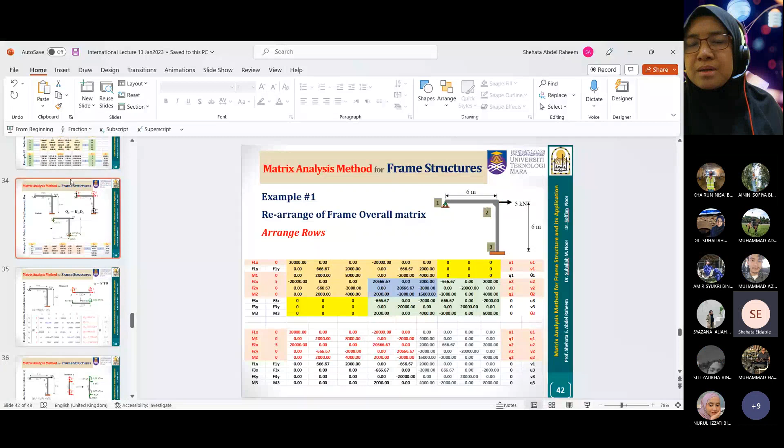Can you open your camera, Prof? Just one moment. I think just a moment to set up. Yeah, no problem. It's good to see you for the first time, Prof. Yes, I am fine now. Now it's available to see the camera and the PowerPoint presentation. Class, can you see the slide, the screen right now? Yes, Doctor, yes, yes. Yeah, Alhamdulillah. I am ready now. Okay.

We have here Dr. Soffian as well. Welcome Dr. Soffian. Dr. Soffian, can you open your camera? Assalamualaikum. Walaikum assalam wa barakatuh, Dr. Soffian. How are you, Prof? Fine, it's okay, I am fine. I hope that you are fine. Yeah, I'm fine here. Okay, Dr. Suhaliah, we can proceed with the lecture, isn't it?

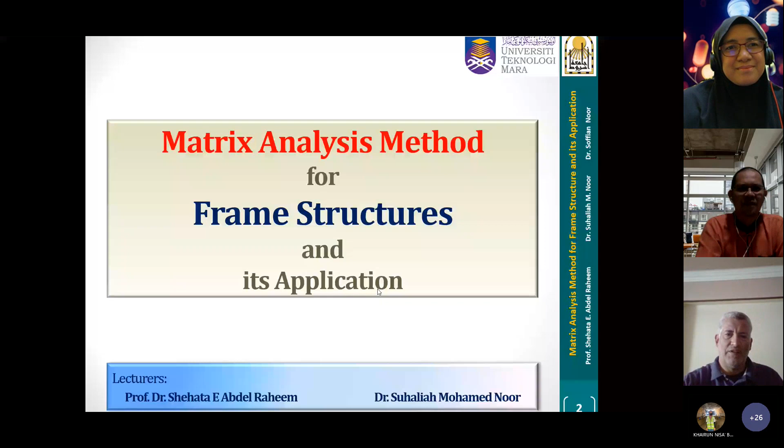Let's go to the next slides. Our lecture today is about matrix analysis methods for frame structure and its applications, with the cooperation of Dr. Suhaliah and Dr. Soffian. I hope we keep this cooperation for the future, inshallah. This is the first step, and maybe there will be more lectures, inshallah. Just now we go with some definitions.

Matrix analysis or matrix methods is an approach for computer structure analysis, commercial software, or either your own software for structure analysis.

As we know, during our previous study we went with conventional structure analysis by hand calculations. This is for structure analysis, structures statically indeterminate or determinate. Our study was limited to simple structures, either beams, frames, or trusses. Once the size of the structure goes higher, our hand calculation becomes unmanageable, so it's difficult to continue with hand calculation. So the size of the structure is limited for hand calculation.

Another approach is for statically indeterminate structures. We have different approaches, either force methods, slope deflection, or three moments, and each method has its complications. Another point is some assumptions that limit us only to rigid supports like roller, hinge, or fixed. However, it's difficult to go with elastic supports or semi-rigid supports. That's some limitation for hand calculations.

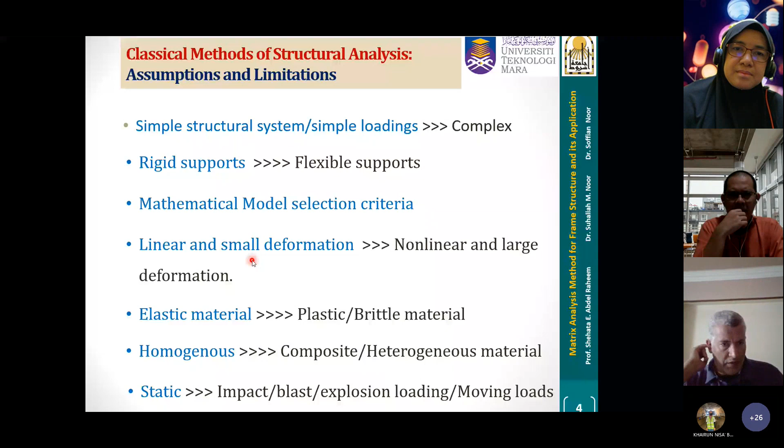Different loading, either statics - that's our classical methods. But with matrix analysis, we can open all these windows. So let's go to the next. So the advantage of our matrix methods,

It's formalized - that's valid for all kinds of structures with the same systematic proceeding. It's computer friendly, and the calculation can be performed efficiently.

Suitable for large structures, it's open for any size of structure. Applicable for statically determinate and indeterminate structures with the same process and proceeding. But for classical methods, you should have different methods of analysis, different approaches, which make the analysis difficult.

Easy to be programmed. However, the disadvantage is it needs more calculations. You should know about discretization and the formulation of the different elements, like curved beams or solids or something.

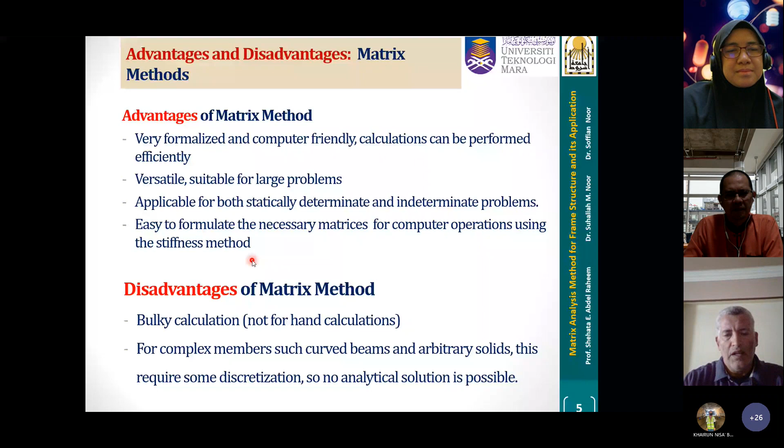The learning outcomes: we should know about mathematical modeling, learn how to apply any commercial software, whatever the name of this software, but we should know the technical terms. So you can go with any software, whatever the production company of this software. Another point, how to read the output of this commercial software and explain if it's logical or illogical.

Another point is the assumptions and their limitations. We will pay attention to these points during our lecture.

The flow chart of the matrix analysis. We should first define our structure, either a frame, a truss, or beams. So this is the unit that will be used to build our structure.

Once we formulate the stiffness matrix of the unit, we go to the global matrix - it's the structural stiffness matrix. And we have a magic equation that solves all structures, either truss, frame, or beams, 2 dimensional or 3 dimensional.

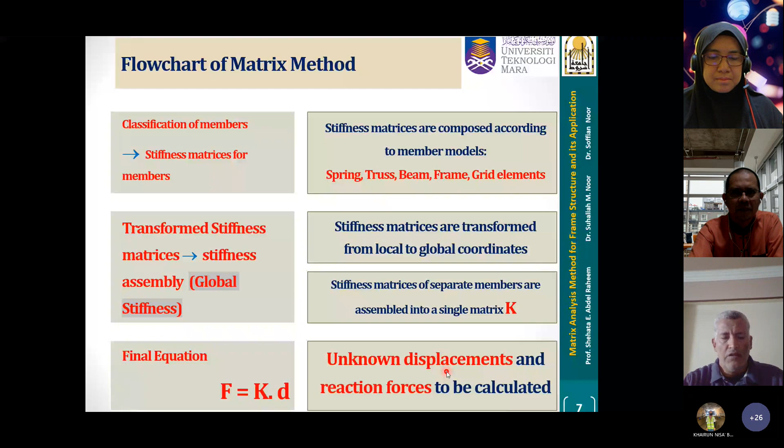During this magic equation, as structural analysis, we should keep our fundamentals. The equilibrium equation should be valid. The compatibility equation should be valid for the displacement. The material constitutive equation that relates stresses to strain should be valid. With these three fundamentals, we build the matrix equation F equals K multiplied by D.

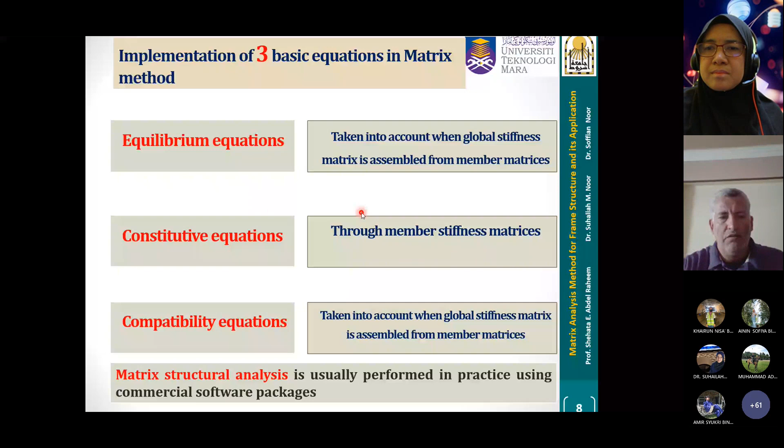Our reference will be the textbook of Hibbeler, Structural Analysis, 10th edition. Even I have some concerns about the proceeding, and I will be highlighting this topic.

The main points for the stiffness matrix analysis for any structure, whatever this structure - either truss, frame, or beams. First, we should subdivide any structure into its discrete finite elements. Then define the nodes and the members. For each member, we formulate the stiffness matrix and go to the global matrix. Then solve for kinematic indeterminacy and define the reactions.

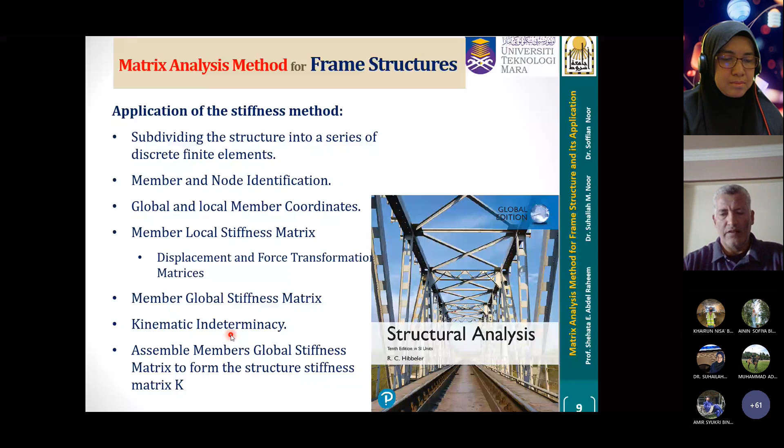This is the introduction. I will go to the subject only.

In fact, any structure in physical condition is a solid structure, but with our assumption that the cross section dimension is relatively small to the span of the beams, we have a one-dimensional element. Another approach is for the two-dimensional element - if one dimension, the z direction, is small, then in this case we go with two dimensions.

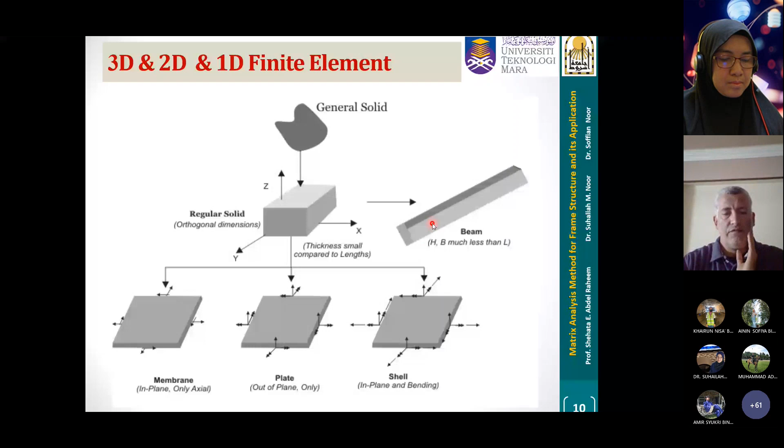Our focus is on the one-dimensional beam, frame, or truss element. You follow with me, Dr. Swai? Yeah Prof, yes. So our concern today is the one-dimensional element.

As you see, the element with the cross section, like that, with the width - beam width, beam depth in this case is H, and this is the span. So physically, this element is three-dimensional, but with the assumption that the width of the beam and the depth of the beam are relatively small to the span,

in this case, we go with a one-dimensional element, like a line. However, this one-dimensional element is the unit, with its degrees of freedom. If we plot the axes, usually the x-axis is adhered to the center line, and y is vertical, and z is out of plane. So in this case, we have three axes or three directions.

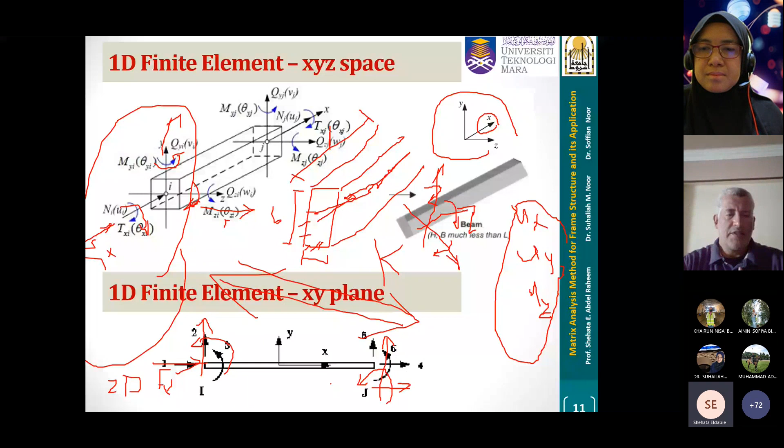For the kinematics, we have only horizontal displacement, vertical displacement, and rotation. These are 3 degrees of freedom. This is the case of frame structures. That's our focus today. For the frame structure, we have two parts. The normal force is one side, and the relation between the normal force and the corresponding displacement u along the axial direction is called the axial stiffness.

And I think Dr. Suhaila during the previous lecture gave you this simple relation. It's equal to the nodal forces at the start point and the end point in the x direction, and the displacement, related with the stiffness matrix. And this is the local stiffness matrix.

Another side is, before we go to the shear and the bending, this is the frame element.

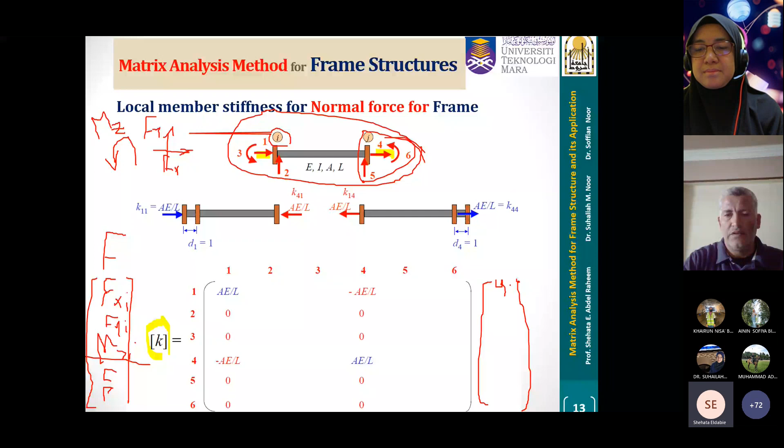On the other side, with the kinematics, we talk about the corresponding deformation: deformation in X direction, deformation in Y direction, and rotation. This is at the start point, and the same for J. This is called the displacement vector. The relation between the kinematics, the displacement, and the forces is called the stiffness matrix. That's our scope today, to find the stiffness matrix.

The stiffness matrix could be the black box of the element. It has the material representative. That means the element of the structure could be concrete or steel, whatever kind of material. The material here is represented by Young's modulus. The other side is the cross section. The cross section has dimensions, whatever its shape. We should calculate the properties of the cross section, either an area or an inertia or polar.

For the normal force, the degrees of freedom reserved for the normal force are 1 and 4. So the position in the stiffness matrix, either horizontal, 1 and 4. This is the position of the normal force. Also for the vertical direction, 1 and 4. This is the position of the normal force.

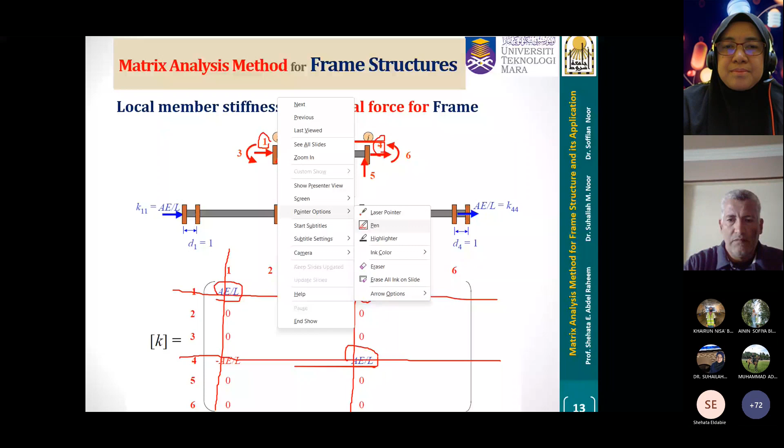So in this case, the normal force has 4 elements: EA over L, minus the same value, positive the same value. This is the stiffness matrix here. So the normal force has its position in the stiffness matrix. The row and the column will be reserved with zero values, either in the horizontal direction or the vertical direction. So this is the matrix of normal force in the expanded version of the frame.

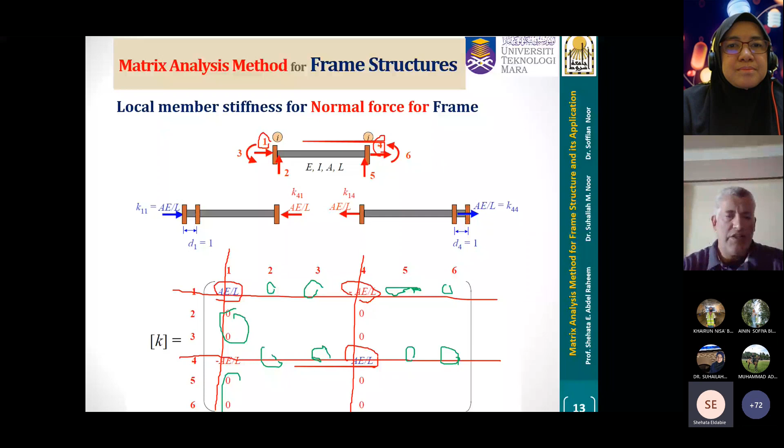Next step, we go to the shear and the bending. As Dr. Suhaila showed previously, the stiffness matrix is 4 by 4, and you could memorize it: E is the material, I is the moment of inertia of the cross section, and L cubed is the geometry. In the 4 by 4 it's 12 or 6L. Either this is 12, 6L. This line is reserved for normal, so skip it: minus 12, and 6L, times EI over L cubed.

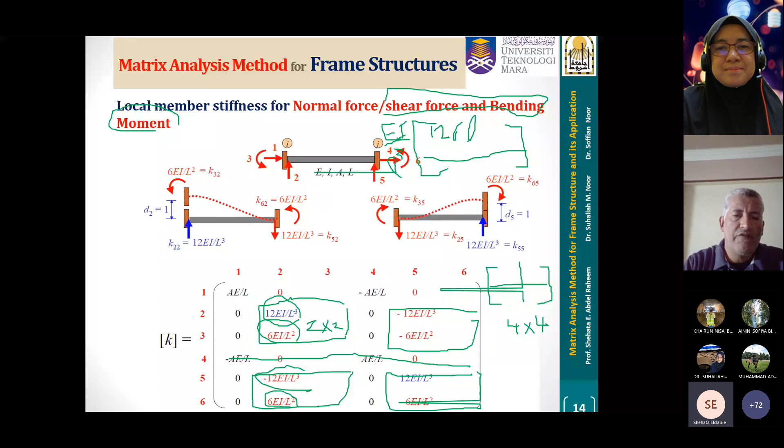Then go on filling all the positions. So this space is reserved for shear and bending moment, and it's 4 blocks. Each block is 2 by 2, and it comes from the stiffness matrix of the beam for shear and bending, originally 4 by 4, divided into 4 equal parts. So each block is 2 by 2. Just drop each block in its position and we get the stiffness matrix for the frame. However, this stiffness is called the local stiffness matrix.

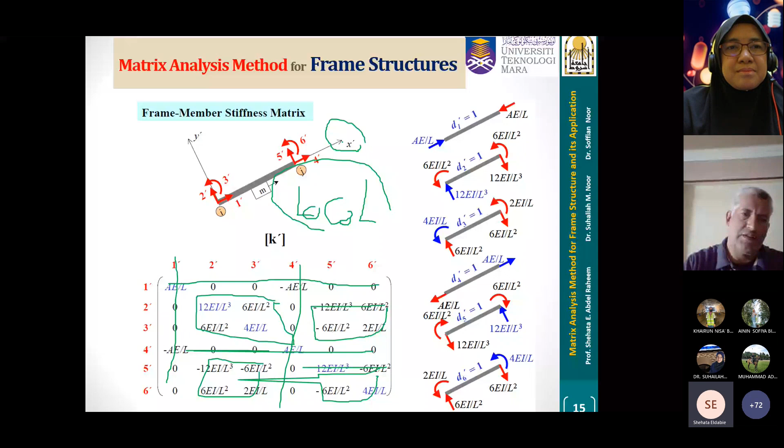It's easy to memorize the stiffness matrix. As we see, there is normal, either in the horizontal or the vertical, and the others, the 4 blocks, are shear and bending. How to use this stiffness matrix for structural analysis? For the local stiffness, keep the x-axis along the center line of the beam. This is the main fundamental. So this stiffness matrix could be used for a beam structure with normal force. For the frame, the stiffness matrix could solve for normal, shear, and bending.

For example, if we have a beam fixed here and a roller or hinge like that. Before, we used the stiffness matrix for shear and bending, of size 4 by 4. However, this is limited to vertical loads only. But if we have inclined loads that could result in normal force, or inclined supports, in this case the beam structure enters the cluster of frame structures, and the local stiffness matrix could be used to solve the beam. We can go with some examples.

So T inverse here could be T transpose, multiplied by local stiffness multiplied by T, and this is the global stiffness matrix. These are the main relations that we are looking for. This is a three-term product. If we multiply, it's called the global stiffness matrix that we have here.

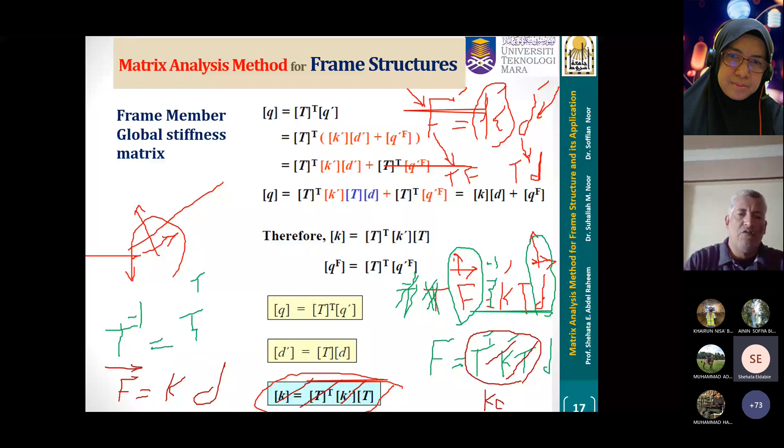Finally, the magic equation: F equals K multiplied by D. For global, our axes are horizontal and vertical, either for forces or for displacement. And now how to find K: just multiply T transpose by K local by T. We get the transformation. It's not easy to memorize, but we will try to formulate it by Excel sheet or have some special conditions for this.

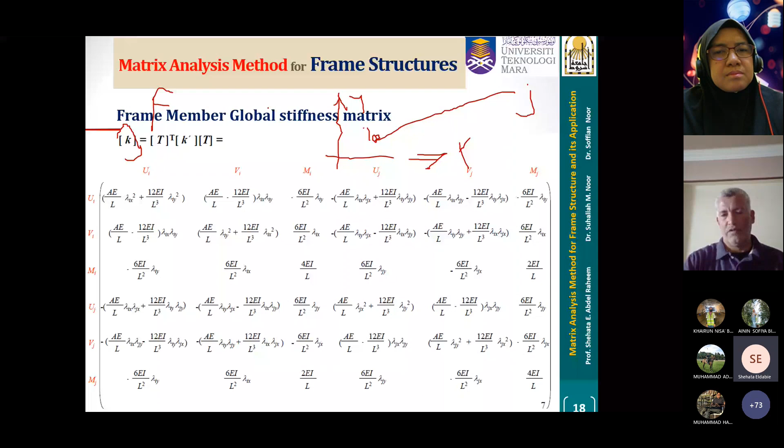So this is the global stiffness matrix for a member with direction x-axis here and y-axis. So if we have this member, this is the start point, this is the end point. This is the stiffness matrix, the relation between forces and displacement. It could be a black box, and it's a function of material, cross sections, and geometry. Geometry includes the length of the member and the angle theta x that we use with the cosine directions.

Lambda x is equal to cosine theta x. And you have lambda y; here is theta y, and cosine theta y is lambda y. And for your knowledge, theta x and theta y have a summation of 90. That means theta x plus theta y equals 90.

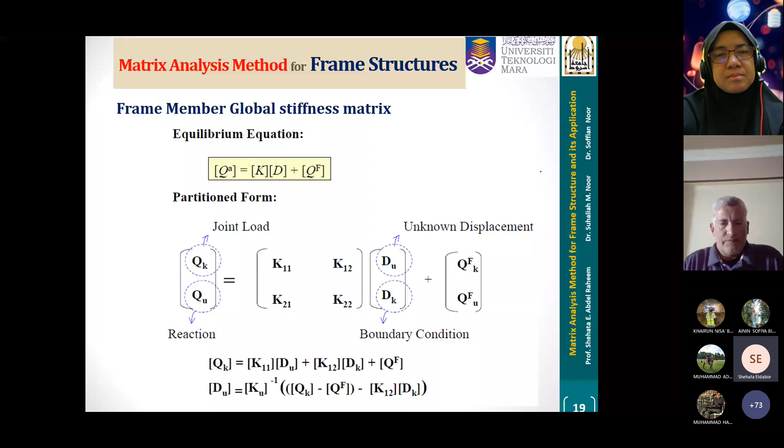Next, this is the global stiffness matrix for one element. For a structure like that, we have many elements. Each element has the stiffness relation. For example, member AB, as a separate member, has normal force, shear, and bending at A, and the same at B. These are the forces. Also the kinematics: displacement in X direction, displacement in Y direction, rotation, and the same at the end point.

The relation between the forces and the deformation is our global matrix. We have two special members: the horizontal member and the vertical member. For the horizontal member, theta x equals 0, so lambda x equals 1 and lambda y equals 0. If we go to this stiffness matrix with lambda x equal 1 and lambda y equal 0, this global matrix will be equivalent to the local matrix.

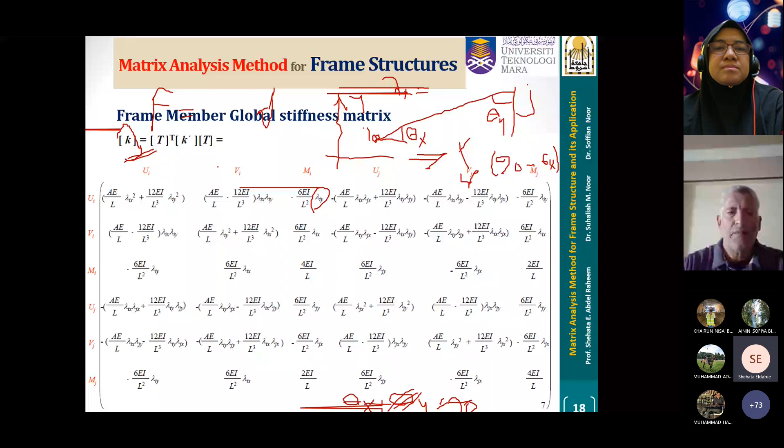So with the horizontal member and the vertical member, we don't need to memorize or even substitute in these steps; only for members with inclined angles. For the horizontal member, we use the local matrix; it's available. For the vertical member, this member BC, theta x is plus or minus 90. In this case, lambda x equals 0 and lambda y equals plus or minus 1. The global matrix will be like the local matrix with some arrangement. I will draw your attention to this during our study.

Let's now go to solve examples and do our structural analysis based on the matrix analysis method. The procedure is fixed. We can summarize it. Step 1, we should select our global axis. For most problems, more than 95%, we use horizontal and vertical. So our reference axes will be the horizontal x-axis and the y-axis. The second step, to define the nodes.

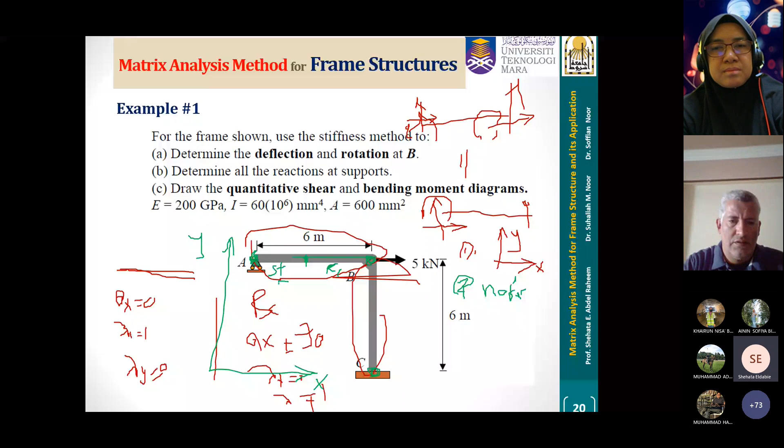Also for the cross section, if you have the cross section here, and here a different section, you should have nodes. This is not our case, but for the future, if you have different material or different cross section, you should stop at this station and make a node. This is the node selection criteria. In our case, we only have 3 nodes, A, B and C.

And this is a 2-dimensional frame. So we only have the X force Fx, Fy and the moment. So each node has 3 forces or 3 kinematics. So the size of the system is the number of nodes multiplied by the degrees of freedom. In our case it is 3 multiplied by 3, it's 9. So I expect, for the future, our force equals the stiffness matrix multiplied by displacement. This magic equation will have a 9 by 9 size.

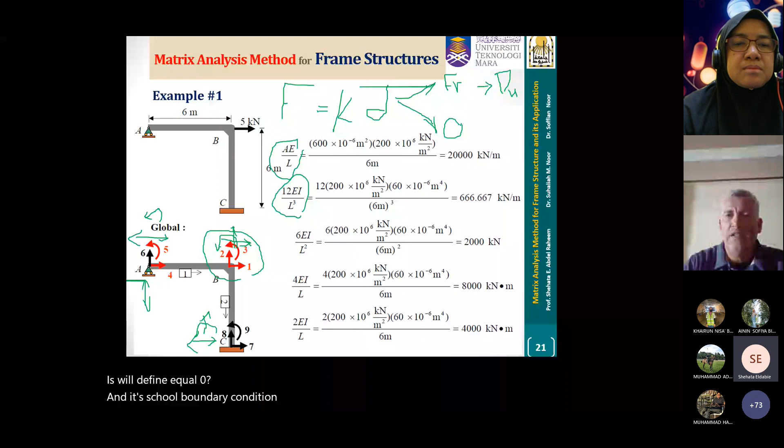The other parts, the vertical deflection here, or the horizontal movement, or the vertical movement or rotation here, these degrees of freedom are known, well defined, equal 0, and it's called boundary condition, and we call it Dk, known. So for the displacement, we have two parts. The same in the forces, we have two parts.

One is the reactions. This is a vertical reaction here, and the horizontal reaction, the vertical reaction and rotation moment. These are required to calculate, and they're unknown for me. So in this case, we call it F unknown.

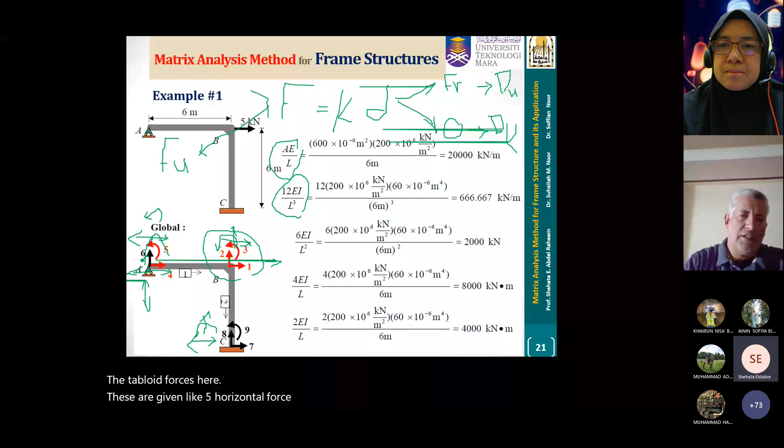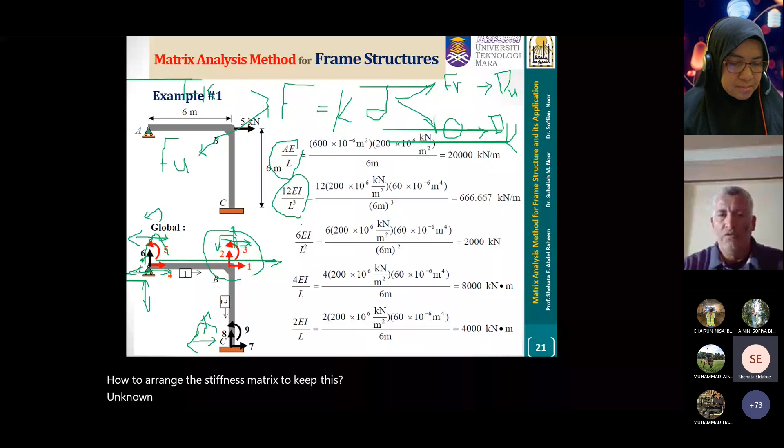And for the others, the horizontal force here is equal to 0. The moment here is equal to 0. The applied forces here are given, like a 5 horizontal force, or vertically, or a moment here. These are the external forces, and for me they're well defined and known. So these are both sides of the equation. How to arrange the stiffness matrix to keep these unknown parameters, either displacement or forces, with the known displacements and forces, for the solution of the structure.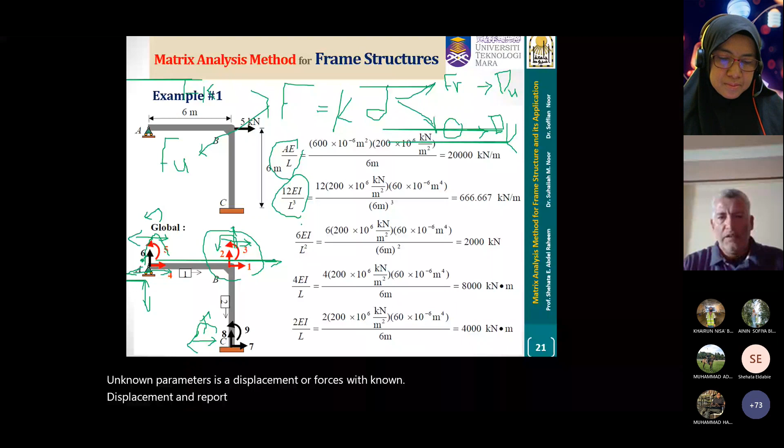Just one moment. Once we define the stiffness matrix, and we have two sides, either the forces... Now, Prof, the slide is missing. Just the screen, your screen. Let's go. Is there any problem? I cannot see your screen. You are sharing Excel right now? Maybe you can share again. Just a moment. In fact, you have the authority to do sharing, I don't have this. The screen sharing is stopped from me. Can you please try again? Yes, now it's okay. Okay.

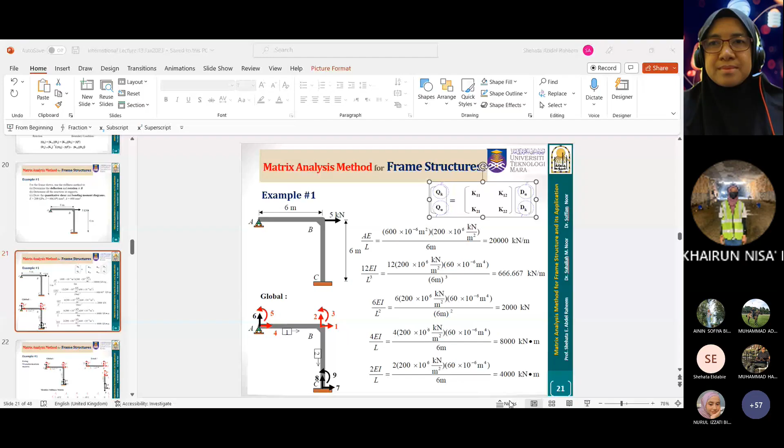Now, once we go with the stiffness matrix for the members, we have defined member 1 for the horizontal, and member 2 for the vertical. And we arrange based on our classification that the displacement has two categories: one is known displacement, and the other unknown displacement.

Unknown displacement, it's to be calculated, and the known displacement, it's already given. We will start with the unknown displacement, and in the same order. Usually, we go with x direction, y direction, and the rotation. So we start now with node. This is one, horizontal, vertical. This is rotation, and in the same order, 1, 2, 3. This is unknown. We go with 4 here, and this is 5.

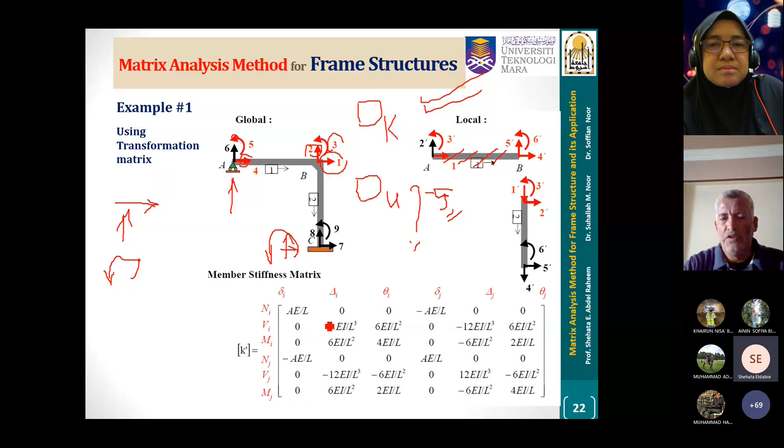So in this case, if we go with the stiffness matrix of member 1, this is almost a horizontal member. So the stiffness matrix is almost the local stiffness that we should memorize as here. And we know that this is the axial deformation in the same direction, horizontal, vertical here, and rotation. This is at the start point. This is horizontal, vertical, and the rotation.

And for this member, we should define the direction. That means the member we call AB. So the member starts from A and goes to B. This is important to measure our angles and to keep the stiffness matrix reservation. So these 3 columns are for the start point. This is for the end point.

Horizontally it is the same. This is for the start point. This is for the end point. So once we go with the numbers, with Young's modulus E and the L, we get the stiffness matrix like that. But how to define it? This is the member, it's AB. So we consider this as local, so it's normal, shear, bending and also normal, shear, bending. These are the columns of this 6 by 6 stiffness matrix.

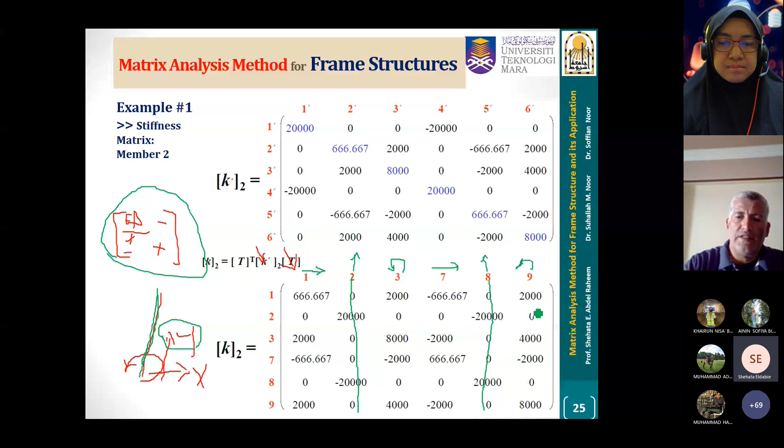And so if we try to find it here, usually the global stiffness matrix is horizontal, vertical, rotation, horizontal, vertical, rotation. So if we go with the normal force here and try to put it in the y direction, we reserve the y direction here, this y, and this is y, this is vertical. With the same approach horizontally, here.

These are 4 nodes. It's the normal stiffness. This is EA over L. If we go here, EA over L is 20 thousand here. This 20 thousand, minus the same value, minus the same value. And the normal force reserves all the column by 0, 0 here, 0, 0, 0. So this is vertically and horizontally. That's all for the normal force.

Next step, we go to shear force, shear and bending. Shear and bending forces, for the simple case, it's these two terms. That's 12 EI over L cubed, approximately. Just filling the gaps. How to fill the gaps? Here, these are terms for shear, then bending. This is shear and bending.

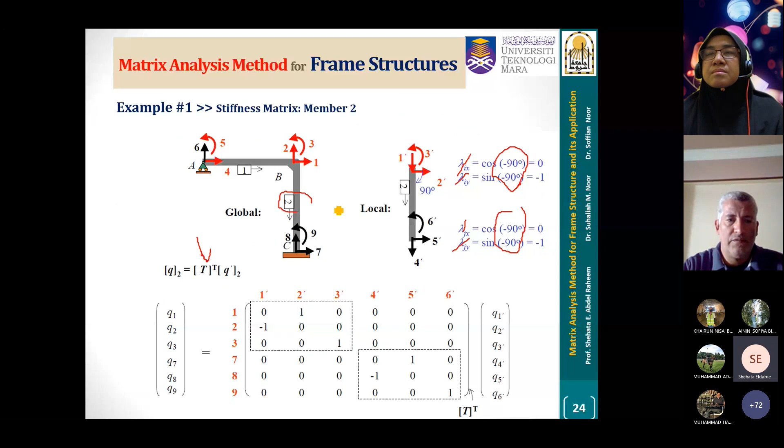Degree of freedom for the vertical member, this is the vertical member. Here is 1, 2, 3.

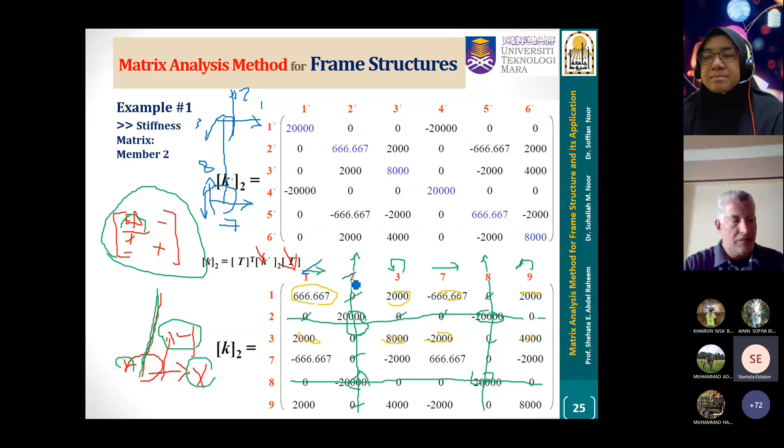Here is 7, 8, with the same concept, that horizontal, vertical rotation. So 1, 2, 3. Then we go to the end point. It starts with 7, 8, 9. It's the same as vertical.

This step is called step number 3. I remind you, our first step is the global axis, our global axis, X and Y.

Second step is the nodes. Third step is the member stiffness matrix. Now we go to the global stiffness matrix. This equation is valid for the structure, for the frame: force equals K multiplied by D.

We take the stiffness for member 1, this is the horizontal member, and this is the stiffness for the vertical member. And we arrange our kinematic here, this is the red line. Now we try to write this equation.

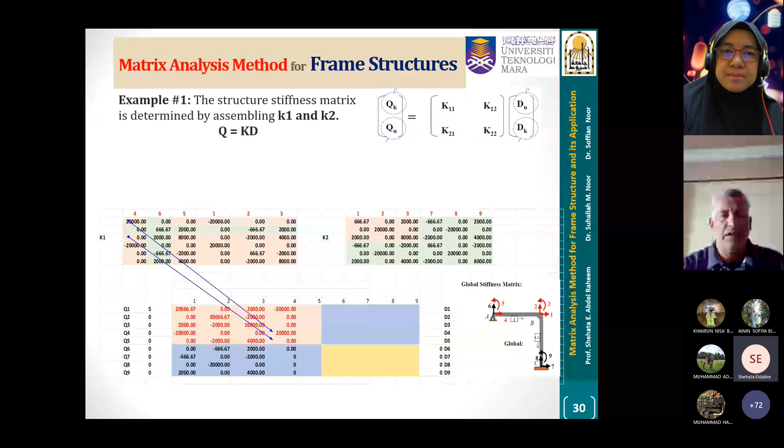This is the step, this is the global matrix. Then finally we get this matrix as a full matrix, based on our classification for forces as known or unknown forces. Known is from 1 to 5, and unknown from 6 to 9.

The same for the displacement: from 1 to 5 is unknown and to be determined, and known displacement is the support or boundary condition. Our global stiffness matrix can be divided into 4 parts. This is K11, this is this part, and the K21. These are the most 2 parts.

And the other two parts may be used later for the settlement or other deformation, but now we just focus on K11 and K21.

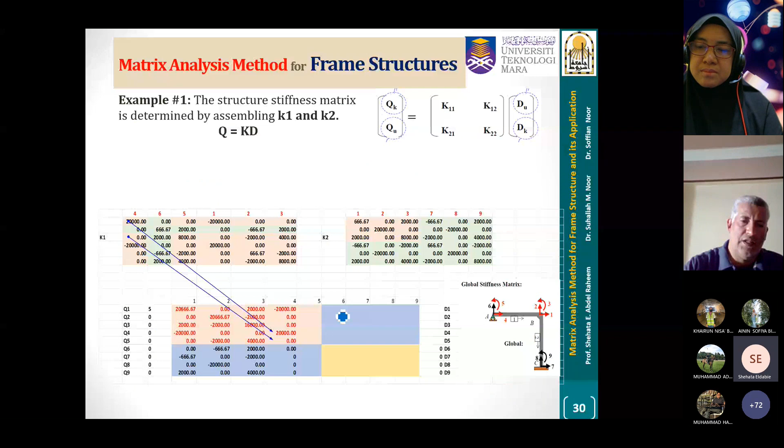If we go with the inverse of this matrix multiplied by this, we get the displacement. So now, if we get this part, it's K11. Here is K11, and this is the forces, known forces, and this is the displacement that I want to calculate.

Just go to here, right? This is the displacement, and this is the applied forces, and this is K11 inverse. Just I am going with this inverse here, inverse. And once I make this inverse multiplied by the force here, I will get directly the displacement.

It's now the displacement, that means D1 here means the horizontal movement. D2 is the vertical deflection here, with the same meaning. This step is called solving for the displacement. So our stiffness matrix is called displacement method because our first step, our outcome, is the displacement.

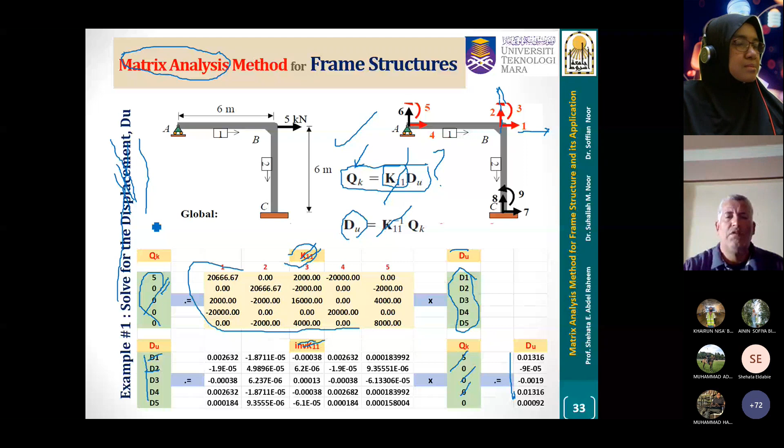Secondly is the reactions. As we come back to here, this is the second equation. This is the force, the reactions that I am looking to get. I can get it by multiplying this row by this vertical row, and I get this equation. Now dk is at the supports, so it's zero, it's the boundary condition. So K22 is not active at this moment. So the unknown forces now is a function of K21 multiplied by du.

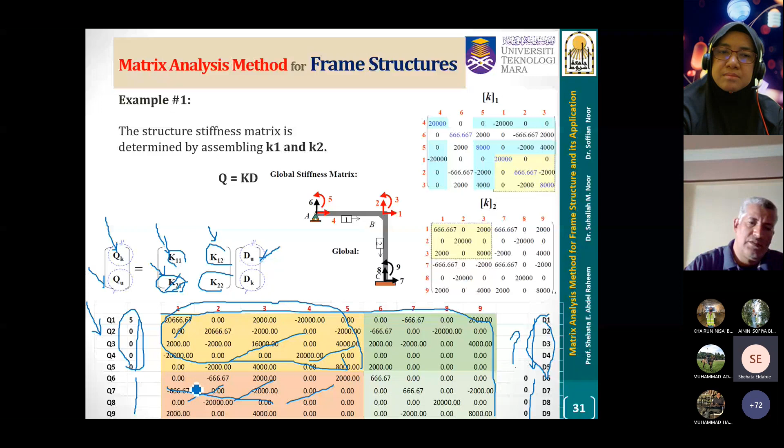That I get from my previous step. Yeah, that's here. So now I got K21 here, it's this part, and to calculate the reactions. Here, this is the reactions, the vertical reaction here. The horizontal, vertical, this is, and this is the moment. This is 6, 7, 8, 9.

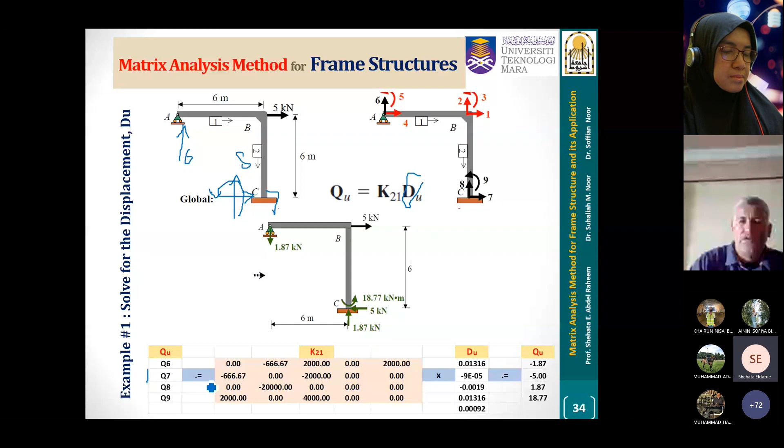And we already have here the displacement from our previous steps, multiplied by K21, directly we get the reactions. Same, that means here is minus, here is minus. Here is minus, that's because in our previous, we just had moment.

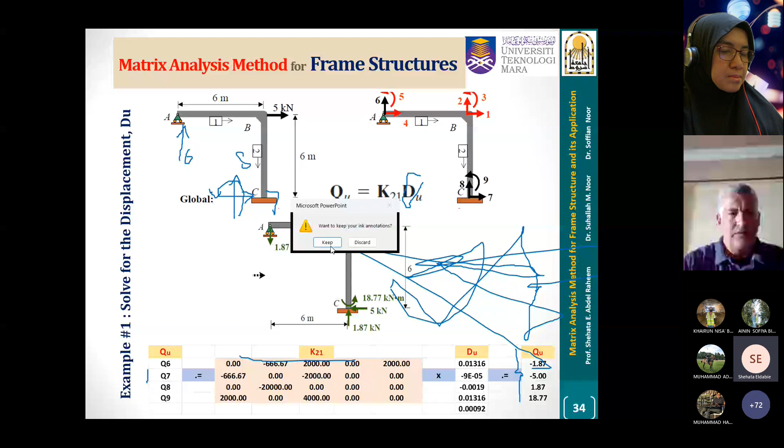Then 1.87 positive, it's upward, and this is the moment. Even during all our steps, we don't mention any equilibrium, but it's the equilibrium condition, and the compatibility of displacement is built into the stiffness matrix.

Now, if we go to check the equilibrium, the summation of forces in the x-axis direction: we have applied force here, five, and hence the reaction is five in the opposite direction, so it's equal to 0.

Also the equilibrium in the vertical direction, here is minus downward. Here is vertical, the summation is equal to 0. And if we go with the moment at any point, either A or B or any point, the summation of moments should be equal to 0 in this case.

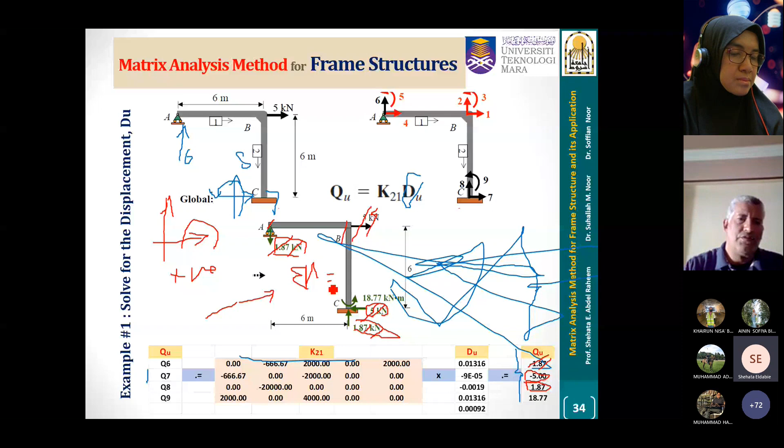Second step is to find the internal forces, and this is for the design as a next step for the analysis. And this is easy, just going with the stiffness matrix multiplied by the kinematics of the member, either calculated or boundary conditions.

And the problem now: what stiffness do we use? Is it global stiffness or local stiffness? Usually for the design, we need the normal, shear, and moment directly, not the global stiffness.

So in this case, if we have a member in the general case, if we multiply the stiffness matrix by the displacement—horizontal, vertical, and rotation—using the global stiffness matrix, multiplied by D, we will get the straining actions of the member: the normal force, horizontal force, vertical force, and moment at the start and the end.

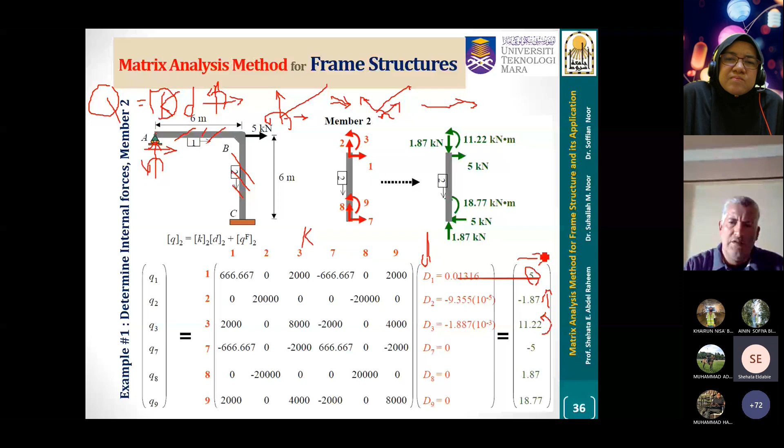But for the horizontal or vertical member, that's a special case, so it's easy for us—just multiply the stiffness matrix by D, and we get forces: horizontal, vertical, and the moment. In our case, for member 1, the horizontal force will be the normal force; however, for member 2, it will be the shear force. The same for vertical force: for member 1 it will be shear, however for member 2 it will be normal force.

Once we have 2 members or 5, whatever the number, I can find the internal forces—normal, shear, moment—and then draw the shear force diagram and the moment diagram. Then we can proceed to the design. This is the stiffness matrix, and this is a standard, systematic procedure to make the full analysis, for deformations, reactions, or internal forces, and it can be applied for beams, frames, or trusses.

In this case, this is the case for frames. And I try to keep my technical terms and solution procedure the same as in the textbook of Hibbeler. But with Hibbeler I have some concern about how to arrange the degrees of freedom. The presentation itself is okay.

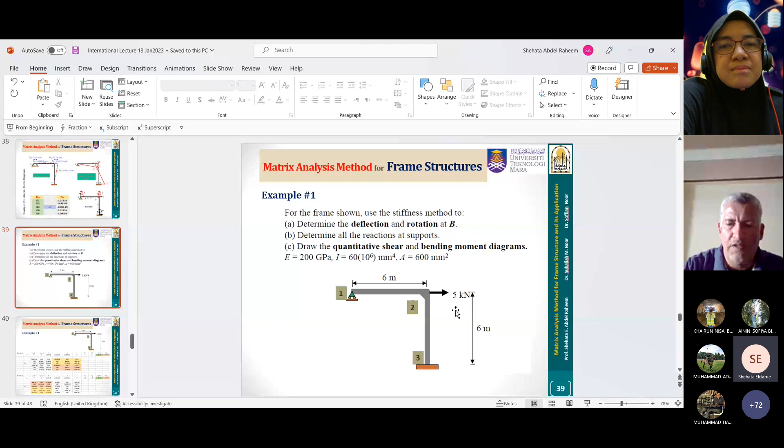Dr. Suhailah? Yeah, so actually it is a very good lecture given by Prof. Shehata. I believe students also learned a lot about the derivation of the stiffness matrix at the beginning of the process, and how we solve for displacement and forces whenever the unknown displacements are more than 3. And the solution that you showed just now is based on the matrix, the inverse matrix, right?

So solve it in Excel—okay, the one that we actually haven't touched before. So Dr. Soffian, do you have any question to ask, or students, do you have any question to ask the professor before we end the session? So far, no. You are welcome. Okay, so far there are no questions. Happy to attend your lecture, Prof. You may continue, Prof.

Actually, I think we set 2 hours for this session. That is why Prof. Shehata stopped just at the right time. So do you want to add anything, Prof? Just one point.

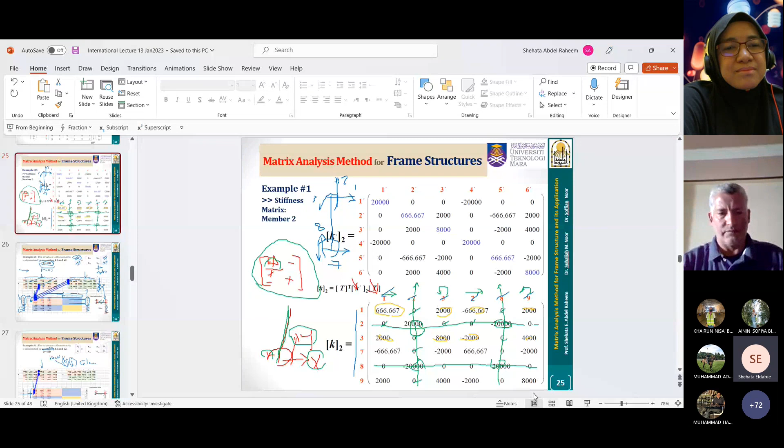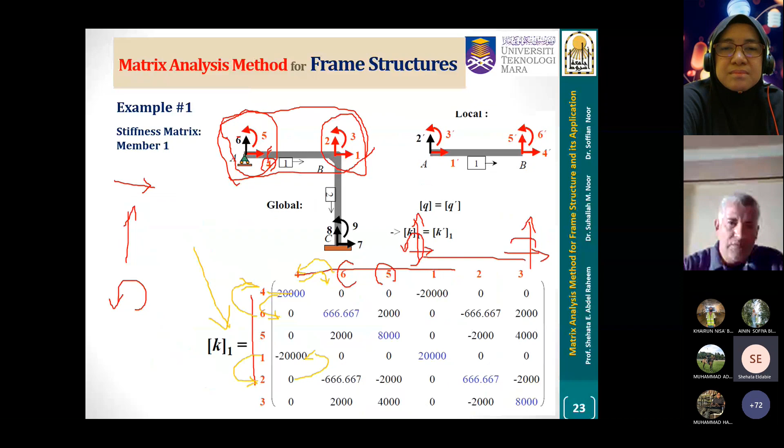Here, just for the Hibbeler concept—sharing the presentation, it's okay. The key for Hibbeler is that it has its background in hand calculation. What does this mean? For our frame here, with 2 members, it's easy to number the known and unknown degrees of freedom. But for frames with a large number of members, it will be difficult for us to arrange these degrees of freedom and number the red degrees of freedom and the black ones.

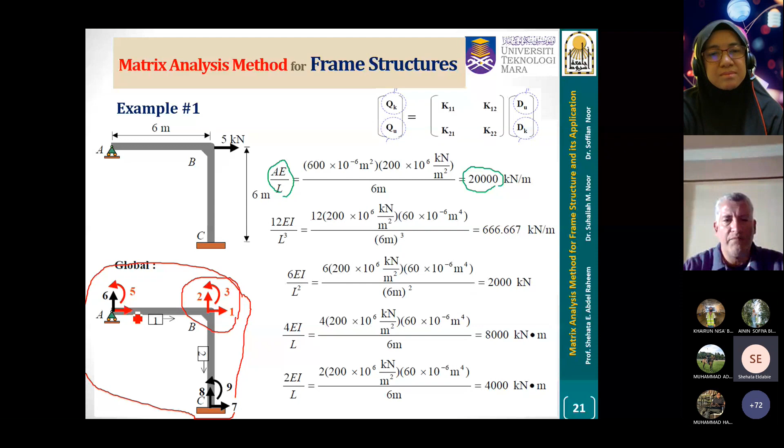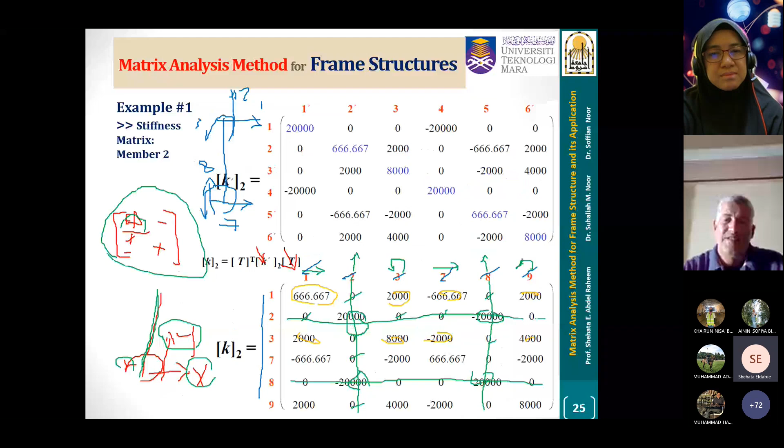Another issue: once we write the stiffness matrix for each member, the problem comes when we go to the overall stiffness matrix. It's tedious and complex to build, and you have to pick up element by element or in small groups. This works for only a 2-member frame, but for a high number of members, it will be difficult to follow this approach for building the stiffness matrix.

In my class, I teach it in a different way. Also, this approach cannot be followed by computer or commercial software, because it involves a manual definition of the degrees of freedom and their arrangement. So in our case, we try to automate it, and our solution with this different approach could start from here.

Just with the same problem, we first define the global axis—we agree it's mostly horizontal and vertical axis—then we go to the nodes and explain the concept of node selection. Usually the supports or the ends of the structure should be nodes, so here should be a node, here should be a node. A change of direction should be a node, and if you have a material or cross-section change, you should have a station and make a node there. Once you define the nodes and the number of nodes, we go with the frame, so our degrees of freedom are horizontal, vertical, and rotation. We're concerned with our 2-dimensional frame with 3 degrees of freedom, and we have 3 nodes.

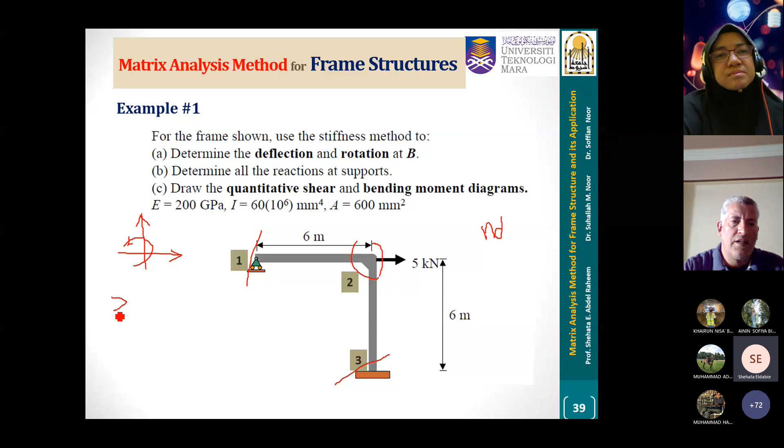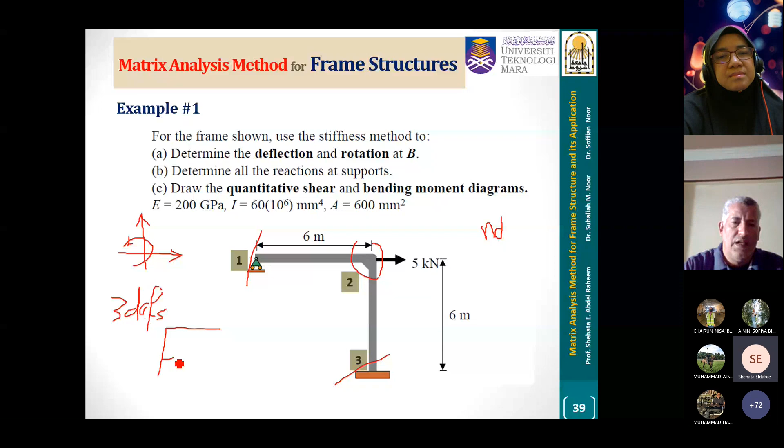So our system is 9 by 9. So the force is equal to K multiplied by D, and K is 9 by 9. The stiffness matrix is 9 by 9, the displacement is 9 by 1, and the force is 9 by 1. Then next step we go with the member.

Member 1 is the horizontal one here, and member 2 is the vertical one. And we write the stiffness normally as we explained in the previous approach, for member 1 and for member 2. And here I just draw your attention that the horizontal member and the vertical member are a special case of the frame structure. So for the horizontal, the global matrix is the same as the local matrix.

So we are concerned with horizontal, vertical, and rotational. This is at the start point: horizontal, vertical, rotational. These are the 6 degrees: 1, 2, 3, 4, 5, 6. For the horizontal member, the normal force is horizontal. So this is row 1 and row 4, and column 1 and column 4. These 2 columns and 2 rows are reserved for the axial stiffness, and the other slots are shear and bending.

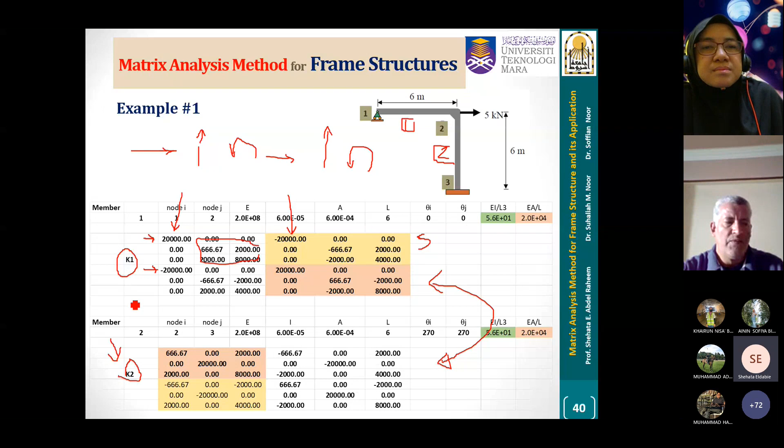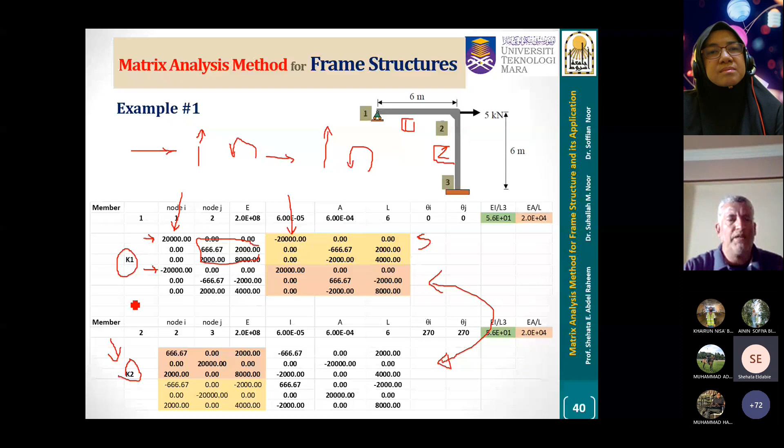So just pay attention, my students, that the vertical member and the horizontal member are easy to memorize without referring to the global stiffness matrix and any angles or troubles of substitution and transformation. Only the general member will be difficult to build up the global stiffness. Then once we get the stiffness for each member, it may be 2 or 5 or 10, whatever the number, I try to build my system without arrangement of the degrees of freedom.

The degrees of freedom are automatically assigned because we have 3 degrees of freedom: horizontal, vertical, and rotation, based on the node number. So this is reserved 1, 2 and 3. Then this is 4, 5, 6. Automatically this one, and then horizontal, vertical. So in this case, the force vector will be horizontal, vertical, moment for node 1, for node 2, for node 3. The same here, the horizontal displacement for node 1, node 2, and node 3.

In this case, I will take this whole block at one time. It comes here. This is around 36 elements. One movement, it's enough. Then I go to member 2, because member 1 is connected from 1 up to 2; this is reserved for 1, and this is for 2. It's the same here vertically. This is 1 and this is 3.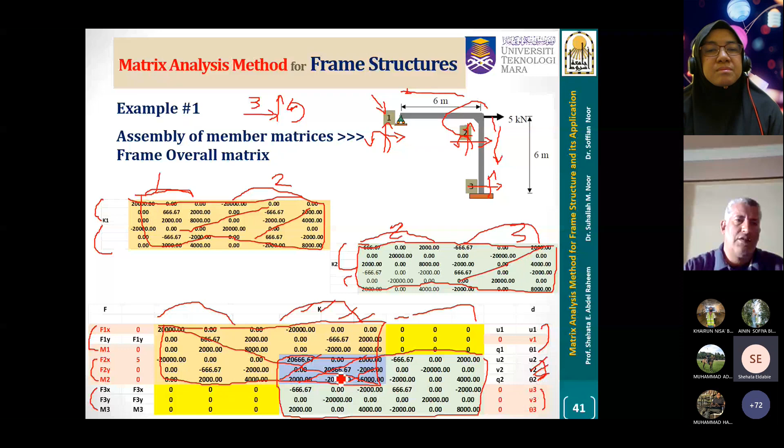You can compare the numbers. You will find here an overlapping area. This overlapping area, if you focus on it, is 2 horizontally and 2 vertically. Why? Because node 2 is connected to member 1 and member 2. Just here, the summation of the overlapping. So this is the stiffness equation with easy assembly. And that's our last step.

Now we just look at the forces and the kinematic displacements. For the kinematics, with the same order, the horizontal is unknown, the vertical is known here, so equal to 0. Then rotation is unknown, so it's still here. For node 2, horizontal, vertical, rotation are unknown. But at node 3, all are boundary conditions, so equal to 0. So here it's a boundary condition.

And the other is known, so the horizontal displacement here, or the vertical, or the rotation, and this is unknown. On the other side, I classify the forces, Fx1, moment, and 2, and these are all known and given forces, while the black ones are the reactions and need to be calculated. I will start the arrangement from here, just changing the seats. I will try to make first the kinematics here with the same order.

Then the same: horizontal, vertical, horizontal, and bringing all of them here. The row is just shifted up and the other brought down. Just one moment. And bringing this down. This we call arranging rows: just shifting between rows to keep the kinematics beside each other and the reactions beside each other.

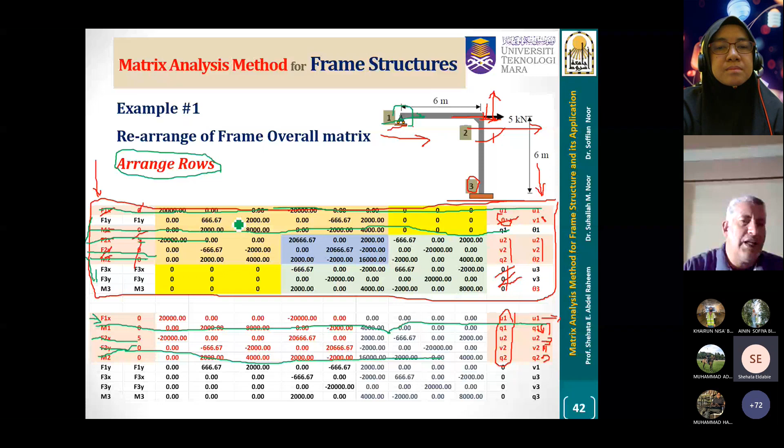But keep in mind, the same you did with the rows will be done for the columns. In our case, we start with F1, horizontal and rotation, and the kind of arrangement we did here for the rows, we should make as a column arrangement. For the horizontal here, it is the same, so it will stay the same.

Rotation here, in the original matrix, is horizontal, vertical. So this will come in the second one. This is coming after, this is coming after, with the same arrangement, just keeping the column of kinematic unknowns in the same order. Finally, we get the stiffness matrix with 4 parts as we defined before. Here, next step.

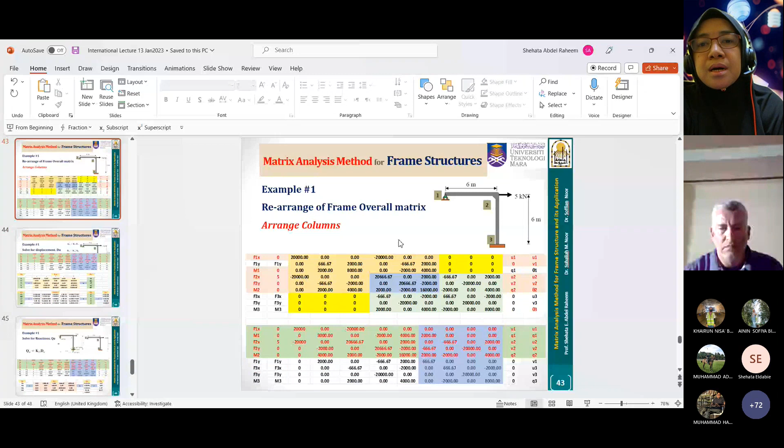Just a moment. Actually, what you are showing now is part of the finite element method. Students will learn this in the next semester. It's okay. Sorry. 5 minutes and I finish. Yeah. Okay.

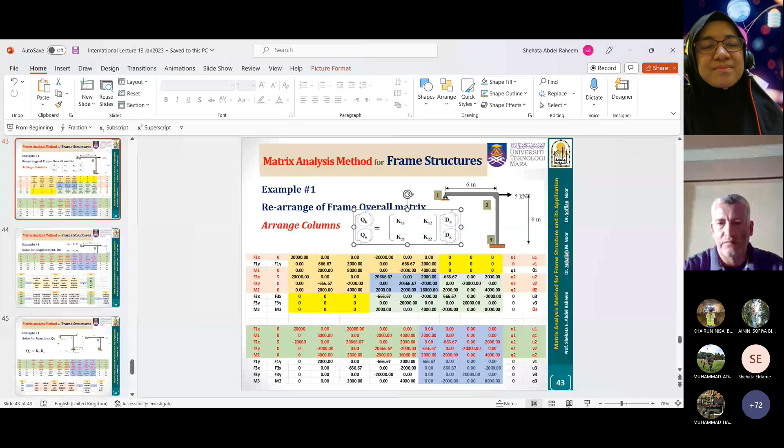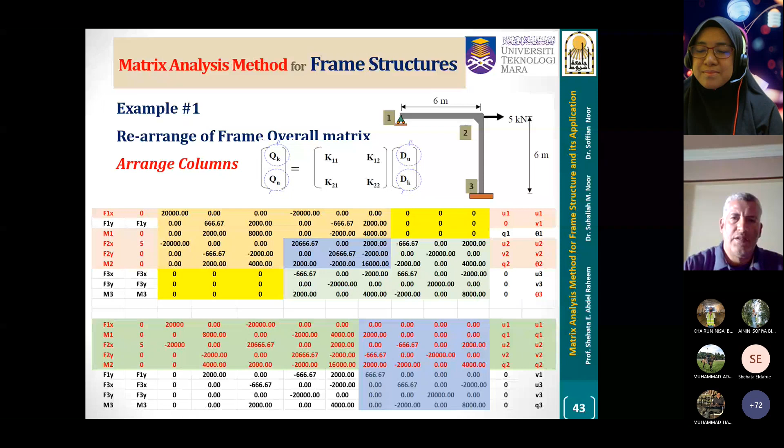By this approach, I will get the stiffness matrix in 4 parts, as we know before. And then I continue with the same procedure: how to determine the displacement as a first step, and then the reactions, then the internal forces. This is the reactions, the displacement. Taking K11 in this part, and this is the force vector, and this is the unknown displacement, just K11 inverse. Then we get the kinematic unknowns.

Next, we go with the reactions, K21, and this is the stiffness matrix multiplied by the displacement that we got from the previous steps. Multiplying these two matrices, we get the reactions.

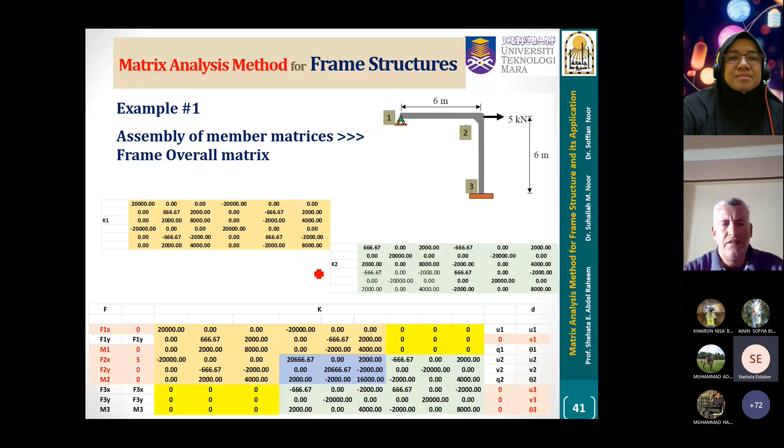The main difference between this approach and the last one is that I assemble the stiffness matrix before arranging the kinematics. And this is automated, can be done by computer for big numbers with any arrangement. After that, based on the boundary conditions, I arrange the stiffness matrix after assembly, not before, to make it systematic. We arrange the rows as one step, then arrange the columns with the same order as the previous step.

In this case, we will get the 4 parts of the stiffness matrix; usually we use K11 or K22, and the other 2 parts can be used for another point. Then we go with the same procedure, just the assembly of the overall stiffness matrix and arrangement for the kinematics. In the Hibbeler approach, you need some hand effort to arrange and then assemble, and for a big structure it will be difficult.

But in our approach, the kinematics of the member depend on the node numbers, equal to the degrees of freedom multiplied by the nodes, and I assemble the stiffness matrix without boundary conditions, so this has more advantage. If I have this frame with a slight change, just changing the roller to a hinge, for the Hibbeler approach it will make a lot of disturbance. But for our case, just changing the arrangement of columns and rows. So finally, we get the same solution while saving some effort.

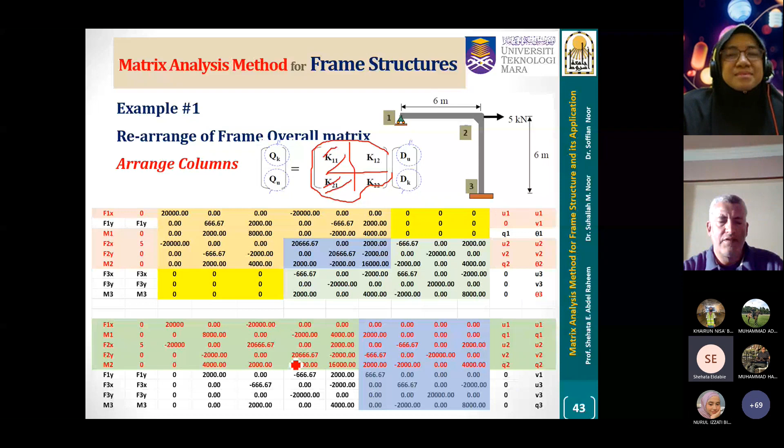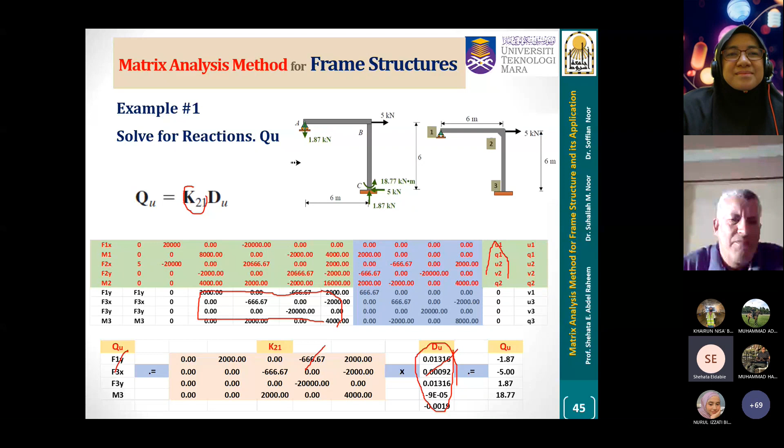And you have the choice to follow what's best for you. And this is almost the matrix analysis for frames for given loads. Indirect loads maybe in another lecture.

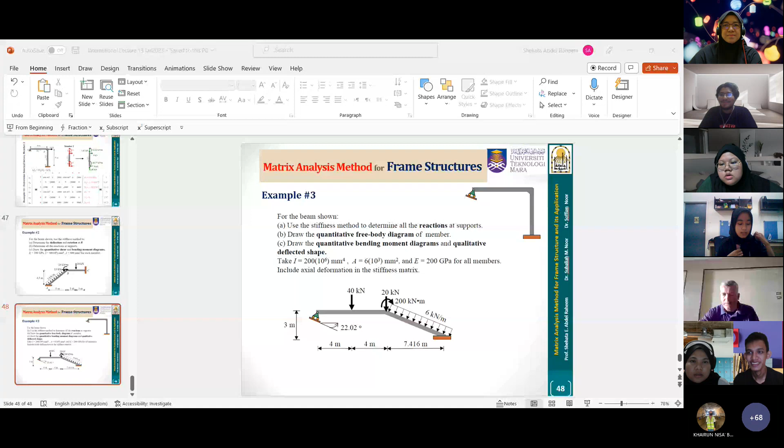Prof, can you please stop sharing first, Prof? Stop sharing the slide, your screen. Stop sharing. Screen, yes. Yeah. It's okay now? Yeah, it's good. Wait.